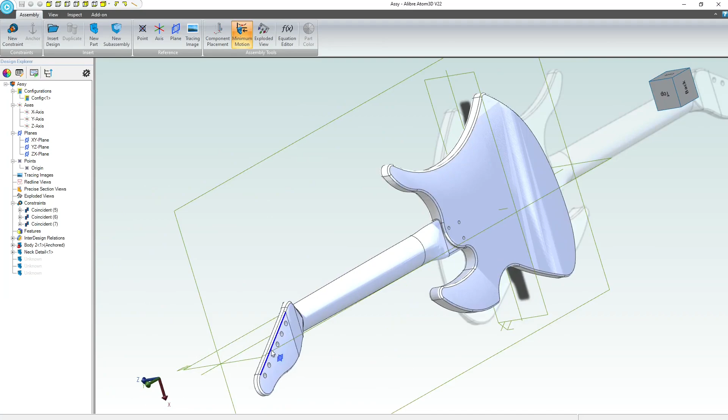Let's make a tuning board for the back of our head here that will accommodate some tuning stuff. I'll get started with that by making a new part.

Let's go with... there we go. We have a symmetric setup there. So now we're nice and symmetric about our origin. We just have to add a few dimensions.

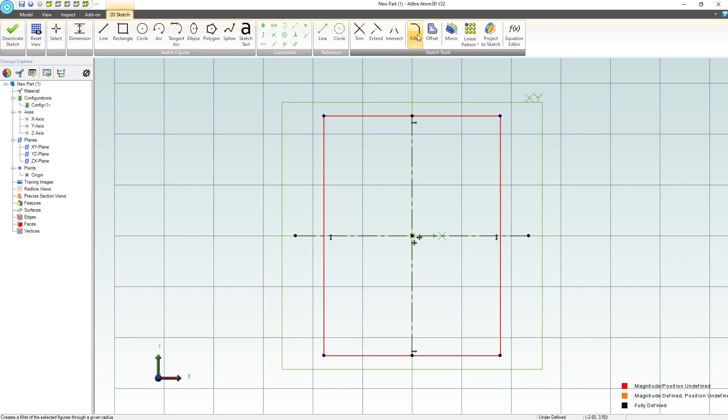Actually, let's sketch fillet this before I add too many dimensions. So we can add a fillet there, apply, and then here, apply. And of course, it just adds an equal relation so that our first sketch fillet determines the size.

And we'll close that. Now let's change this radius to maybe 0.125. Again, I'm working in inches because I have projects in both units.

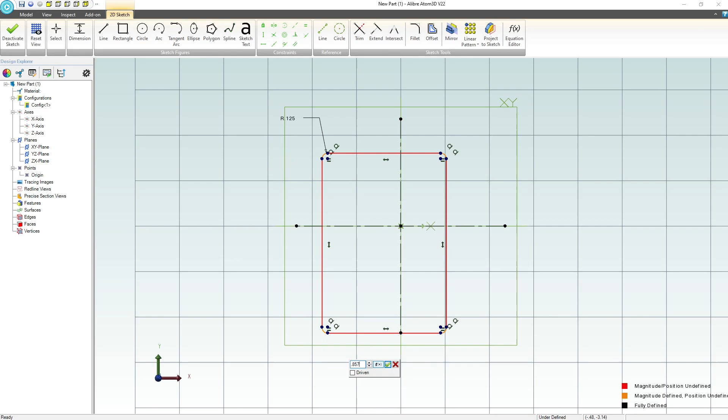Let's go to dimension. We'll give this an overall length here of maybe 0.825 rather, and I'll choose an equal relation.

So it looks like when I've added my sketch fillets, the symmetric relation that I added has not been there anymore, so I'll go ahead and re-add that.

We're going to say there's our line of symmetry and there's our two points to be symmetric. We'll do the same thing over here. And now we're fully constrained.

I would like to add a circle, and I'll add a dimension maybe from this edge. We'll go 0.254.

And then I'll add in just a relation there, 0.4125. I think that'll be all right.

Next, I want to push this out a little bit so we'll just have a little bit of a different profile. What I'll do is take this, right click, and convert to reference.

I'll grab an arc, and then I can add a tangent arc. I'll go with vertical.

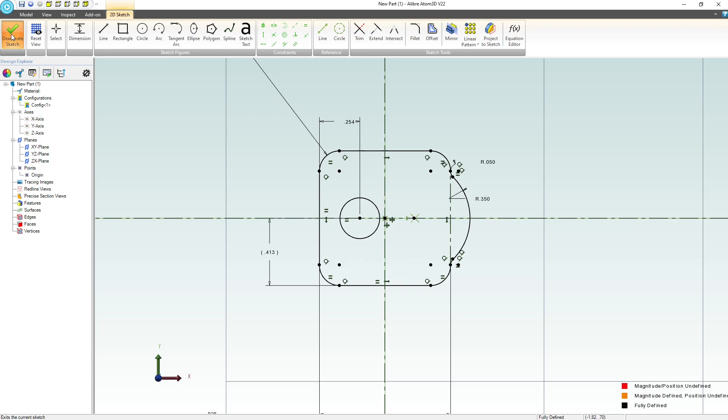So we'll deactivate the sketch, and then we should be ready to extrude. Let's do an extrude. We'll go to a depth of something like 0.05, real thin plate. And then we can move on to the next part.

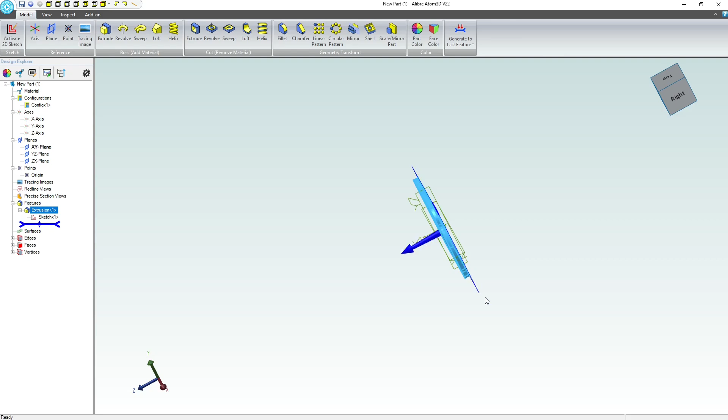And that would be, how about a simple rectangle, right? So we'll say that this plane is the bottom face of our plane, or I should say our tuning plate. I'll activate a sketch down here, and convert a reference figure right here, and that will give me a nice edge to reference off of.

And you can also add that in just with the relation, right? Now we'll go dimensions, and we'll make this 0.275 and then 0.05. You can also make that like sheet metal, right?

If you had Alibre Design Expert and start making this as a sheet metal piece with this being a bend. But I think what we're doing here is just fine.

Next, looks like I did not maintain association. So what I'll do is highlight these two points and say coincident, right? And then just to even things out, we'll make this horizontal.

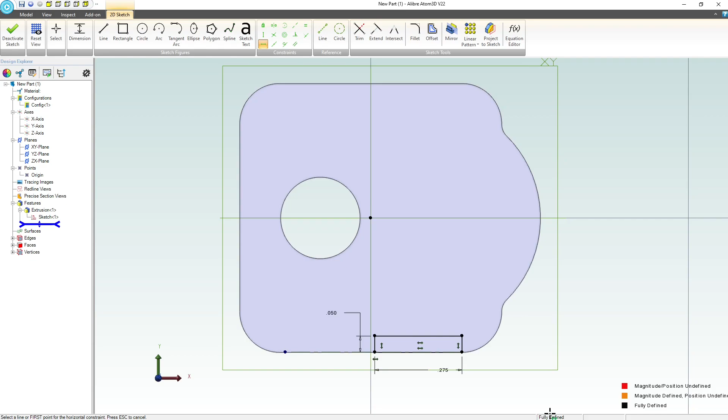And Alibre doesn't fully define a sketch if a construction line isn't fully defined. So we're technically fully defined here.

And how about I extrude? Let's do a depth of like 0.3. And then I have to select my sketch. There we go. All right, so we have that.

Next, let's do another sketch. In fact, let's choose this inside face. You can do either one.

And then from the origin, we'll make this hole something like 0.26. And this could vary depending on your design intent, right? With real design intent, it may be more important to go off of this face. So it's just something to keep in mind, depending on what you intend everything to fit together with.

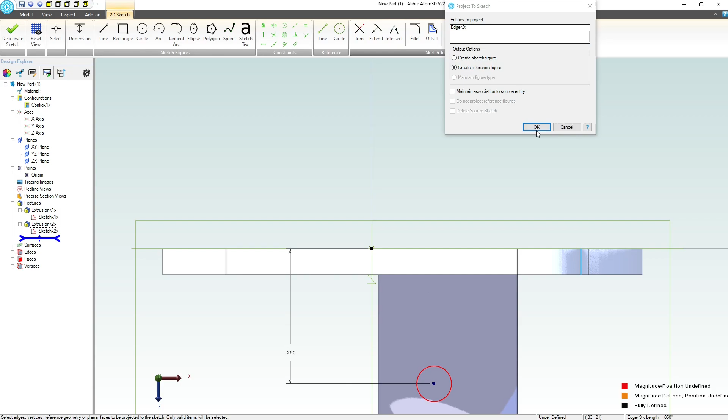Next, I'll project a reference figure. How about this guy? To my sketch without maintained association, right? That's right where this arc ends.

So if I reset my view, I can reference that point, and I'll give this a horizontal dimension of 0.257. That looks about right. And then what diameter?

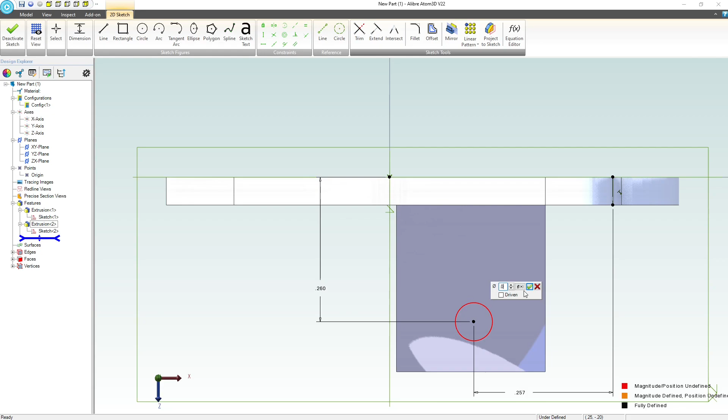How about 0.09? It's not very thorough to just add a hole right there, but I think for the level of our assembly and what I intend to portray, this gives the user the tools for what they need. We'll do an extruded cut through all now.

And let's do a mirror. So we'll mirror this extrusion and that extrusion, both those extrusions, across the ZX plane. And there we have it.

So those are mirrored. I think that is going to be an adequate tuning plate for now. We'll have to add in some screw holes for some really small screws to hold this in place, but we can do that a bit later.

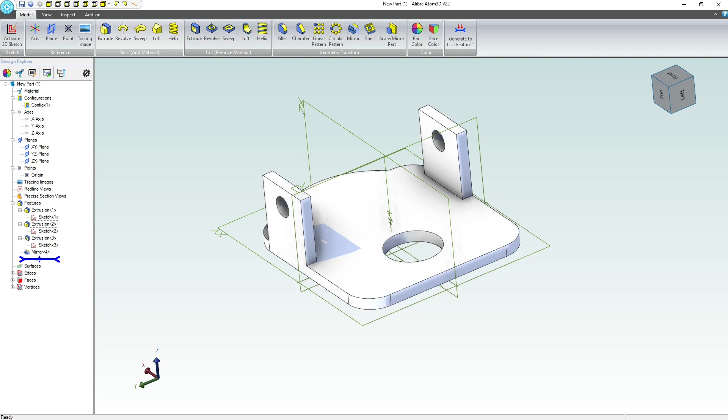So I'll close this part now, and here's our assembly. Let's add the tuning plate that we just made. There we go.

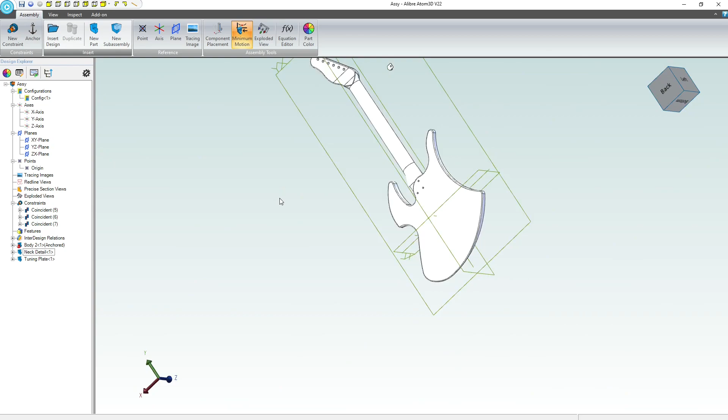So we're going to say new constraint. We'll line these two faces up, flip this guy around, and then we'll take this hole, and maybe I'll start right there, right? And that looks good to me. Next, we'll want to have a spur and worm gear.

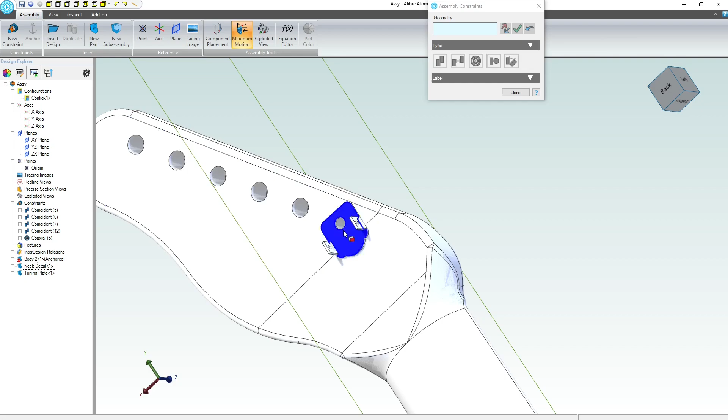So let's talk about how to get a worm gear in there. Now, you can model one—quite difficult, but it's possible. I want to cheat here and use FreeCAD.

FreeCAD is pretty good with gears. So if you're interested in FreeCAD or want to follow along and you don't have FreeCAD, which would be incredible because almost all my stuff is in FreeCAD, here you have freecadweb.org. You can go to downloads and you can download Windows, Mac, or Linux. And I imagine you're using Windows because Alibre is a Windows software.

You can also go to the development versions on the FreeCAD releases page. Version 019 is an excellent version. It's really good, and it's open source, so you can get this for free. It's trustworthy software. I use it almost every day.

So let me open up FreeCAD. I think I'm using version 018 here. Yes, I am. And I'm going to create a new part over here. And in fact, I heavily recommend going to version 019 because this will be a whole lot easier for you to do so.

So in version 018, you may have a broken add-on manager. So you go Tools, Add-on Manager, and if 3D Printing Tools is the only one showing up, go to version 019, the latest version, and this will have an option to install something known as FC Gear, or the Gear Workbench. I already have this installed through other means. So here is the Gear Workbench.

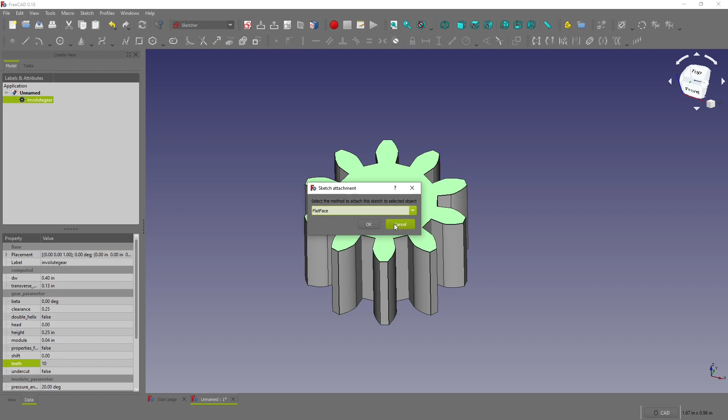I can go to my sketcher workbench now and create a sketch on my face. So that's just as simple as going into Sketcher and creating a sketch. Again, if you're watching this, you're probably familiar with FreeCAD. If not, I've got a lot of videos that cover how to use FreeCAD in depth. But here we're making a sketch just like in Alibre.

So I'm going to start by making—I clicked on my polyline button right here. And I want to add a symmetric relation, right? And so just like in Alibre, I can just click point, point of symmetry, and other point, and now we have a nice symmetric relation, just like in Alibre.

And now I click these two lines. In fact, I'll hit the equal button, and there we go. Now we've got two lines. I'll make a center point arc from here down to here, and then back to my polyline tool.

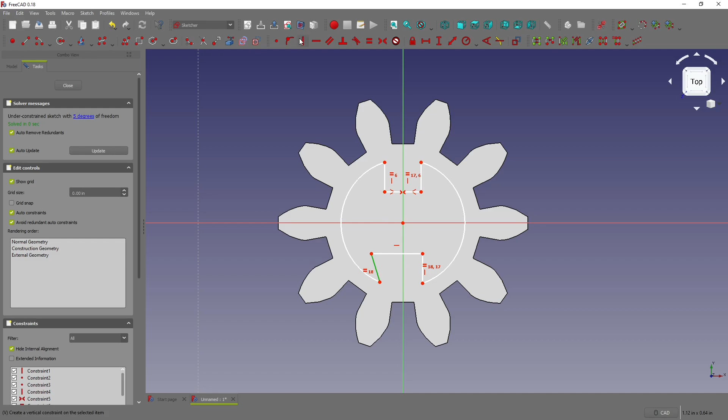And then we'll go back to the center point arc tool, which is right there. Bam! Just like that. Now we're going to say equal, and I'll choose these two lines and these two lines. So now all of these lines are equal. I'll choose vertical here. And we're getting there. I'll choose equal again to make these two lines equal.

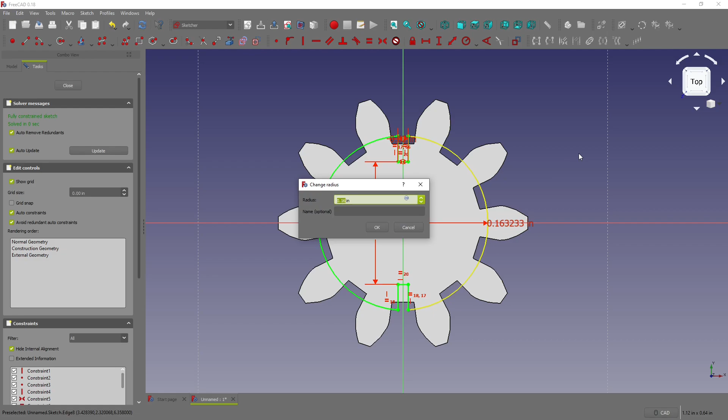And then I think it's just down to dimensions. I'll choose a horizontal dimension from up here, and we'll make that 0.002. We'll choose a vertical dimension here, and I'll choose how far apart I want these to be, and we'll say something like 0.23, there we go. And then I can choose a radius dimension right here, and I can say I want my radius to be 0.255.

I was thinking in terms of diameter, so I'm just going to divide that by 2. Now we'll close, and then we'll do a Boolean.

We'll come over here to the part workbench, and I'll choose Extrude. Maybe I'll make this 1 inch symmetric, maybe 2 inches symmetric, just to see that this goes through. We'll apply and close that.

Now I have this option in the part design where if I click on my gear and then click on the extrusion, I can choose this blue and white circle that says make a cut of 2 shapes. So I choose that, and there I have my final gear. Let's save that. File, save.

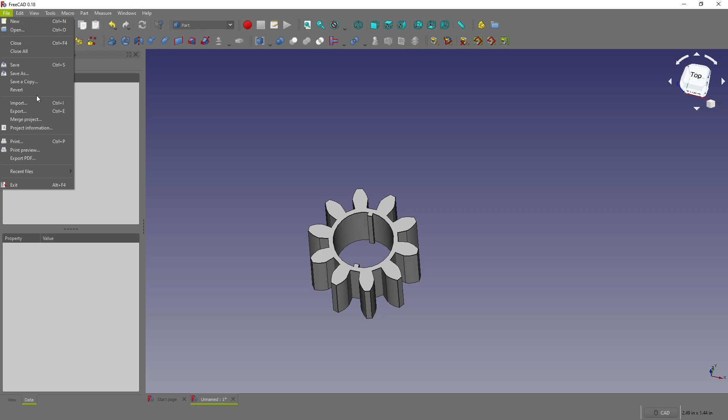This will be available on my GrabCAD account if you'd like to download this. I also will select my gear and choose to export my gear into a step format. I'll call that Spur gear. Save. So there's a step file now that represents this Spur gear.

We also want to have a worm gear for when we go to tune things. So I'm going to go back and create another gear, and I'll click on worm gear, which is the 6th option in. Notice I get a nice 3-tooth worm gear.

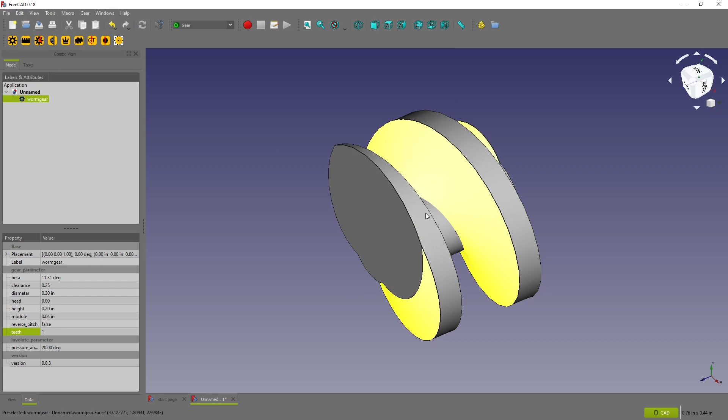So I'll highlight this, and let's do a few adjustments on our worm gear. For our teeth, I want to take this down to be a single tooth worm gear, and I'll hit the little refresh button up here. That will turn it into the 1-tooth gear that we want.

We don't care about reverse pitch. Our module's good. Our height, I'll take it up to 0.5 or 1/2 inch, so I've got a bit of a longer worm gear now. Head is good, diameter is also good, and clearance is good.

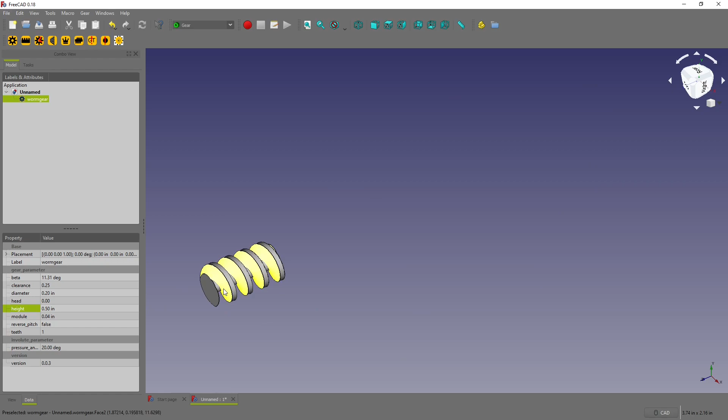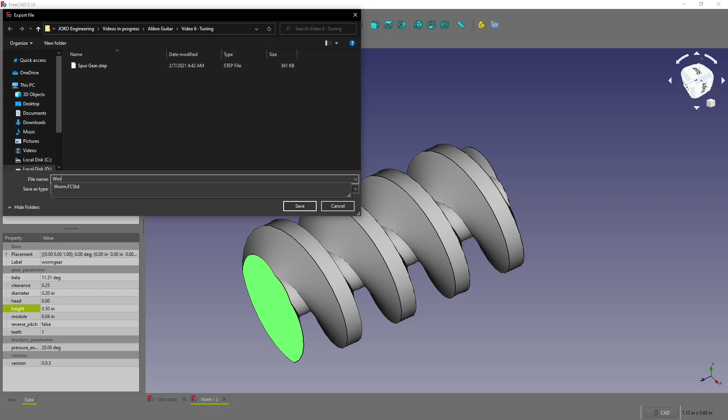I think we're actually looking very nice on this, so let's save this, and we'll save this as a worm. We'll also export this as a step file. We're going to say export. I have step pre-selected, and we'll export that as worm.step.

So I've got several gears. Let me pull Alibre back up. Now again, this is just working in the hobby license. You don't need a special super fancy license to import step files, and we can use that to our advantage.

The first thing I can import would be my Spur gear. That'll be pretty easy. So we're going to say insert design. Now if I try to import my Spur gear, where I stitched a solid, I can have several options like heal or making tolerant.

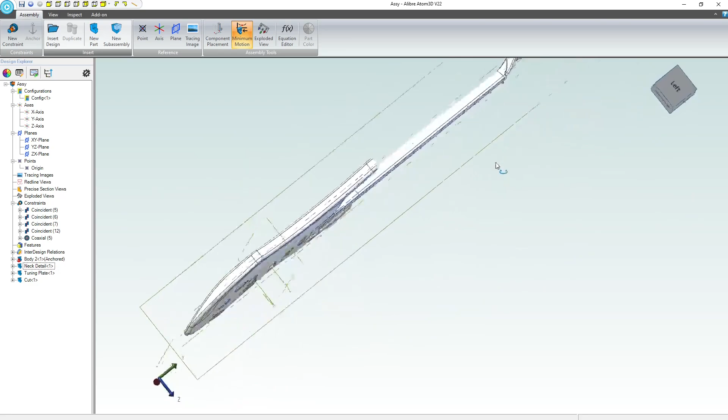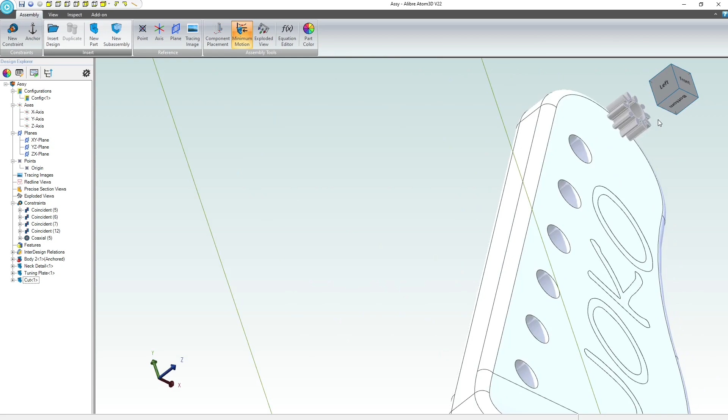My imported body is right there. So there is my step file that I exported out of FreeCAD and into Alibre. One of these days, I know you can get an involute profile in Alibre. You have to do some interesting things, but I'm confident I can. So if there's enough interest, I'll show how to model an involute spur gear in Alibre.

Let's go with new constraint here and make sure that we're oriented right. Looks like we are, so I'll select that. We're going to go with a nice concentric right there. And I really like that when you have dynamic parts in Alibre, you can just click and drag. That is such a luxury.

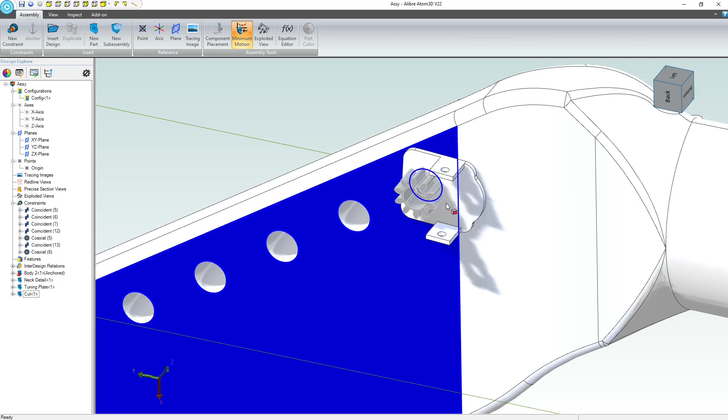Let's now work on our worm, and I want to make kind of the tuning knob onto our worm as well. So for that, I'll open my worm instead of importing it, and I'll heal, make tolerant, whatever.

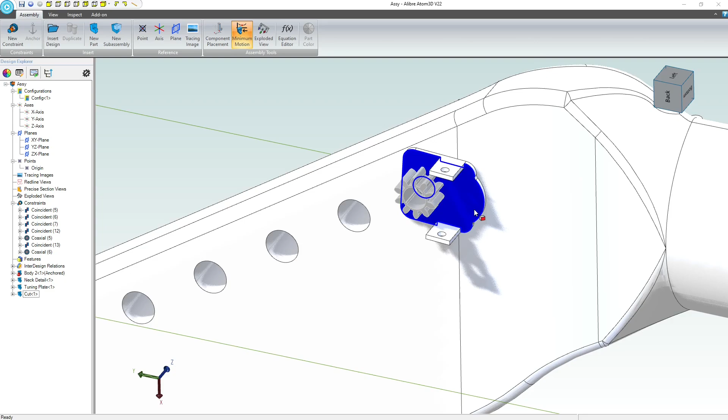By the way, if you do have any visibility problems - oh, and actually I just opened this up and there you go, visibility problems. So if this happens to you where an imported part isn't showing up, it's actually pretty easy to work on.

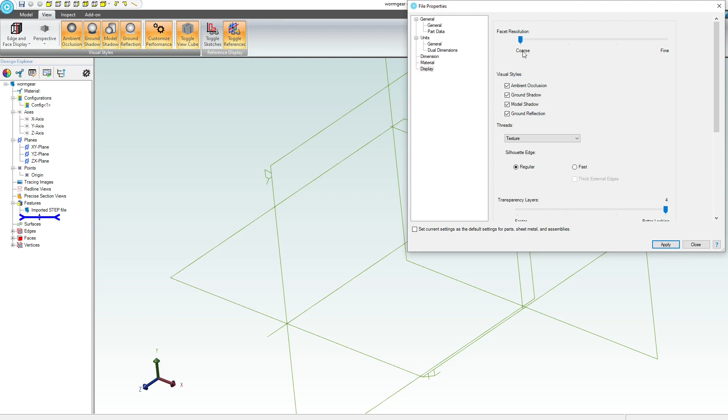We're going to go to our View tab, customize performance. I'm going to take my facet resolution, drag it all the way to coarse, or if it's already on all the way coarse, you can drag it to some other setting, say apply, and then it shows up. Then I'll just drag it back to my previous setting, apply, and look how much finer that became. That was a pretty easy solution.

So what I would like to do is make a sketch, how about right on our XY plane. We're going to say Model, Activate 2D Sketch, and I'm going to create a circle right on my origin. We're going to use a dimension and make that about 85 thou, 0.085.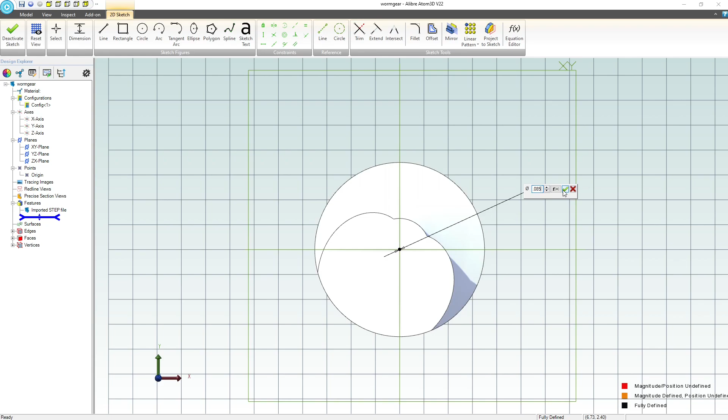For some reason that's in millimeters because it came from FreeCAD, right? So I'm going to type 0.085 inches. There we go. A lot of my FreeCAD projects have become metric. Let's go with Extrude. We'll go dual depth.

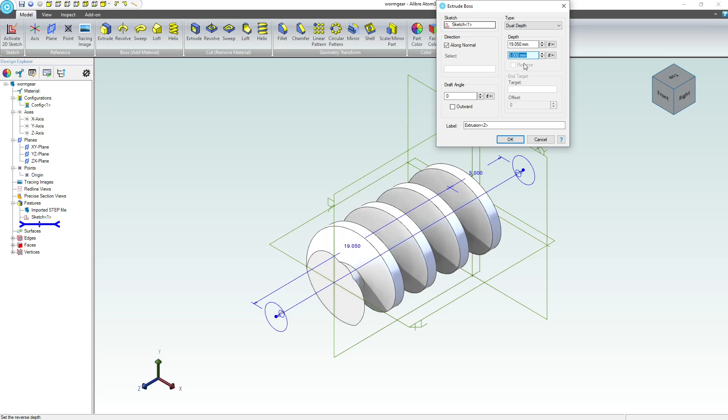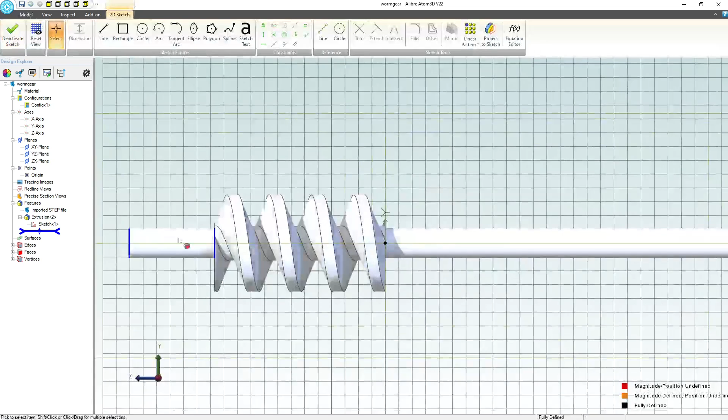How about we have this side be 0.75 inches, and we'll come over here, 1.25 inches. That's the length I want. This is the rod that our worm gear will spin around. I think I'll need a spacer to put in our prongs, so I can just model that right in here.

Let's create a reference figure to here. I'll maintain association, and I'll choose a vertical relation between these points, then a horizontal relation between this and the origin. Let's go with a dimension of 0.116 -- and of course, I need to change this document to inches, but I think I'm almost done, so we'll be okay. And then 0.065 inches.

Let's deactivate. We'll do a revolve. I actually need to choose an additive revolve -- that'll be much better. We'll revolve around that axis. So we click on this axis, we revolve around it, and that's looking good.

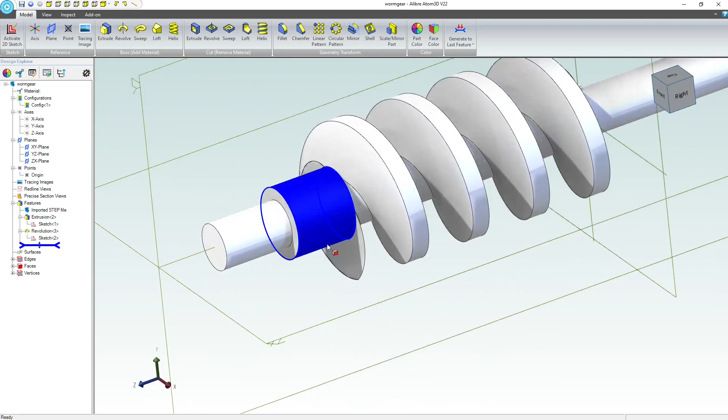Now I think we'll just add the tuner, cut it to the right size, and we're done. I'll activate a sketch on here, and I'm going to make a line. Actually, let's focus on using the sketch mirror here. I think that would be very efficient.

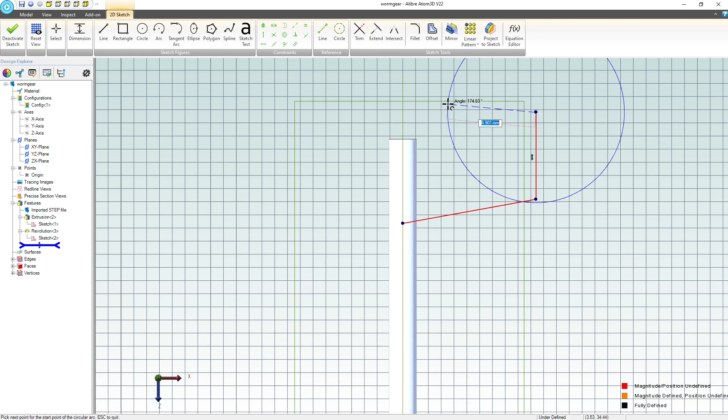I'll choose an arc -- a center point arc, so I'll put the center right on that center axis. We're going horizontal from here to here. We'll add in a dimension and make sure this is radiused properly. I want to go 1.25 again, inches.

Let's go from here to -- nope, I want to have an angle. Can I reference this for an angle? If not, let's grab the center line -- that's just as easy. From here to here, we'll take an angle. Let's say 160 divided by 2, or an 80-degree angle, so you have 10 degrees off horizontal on either side.

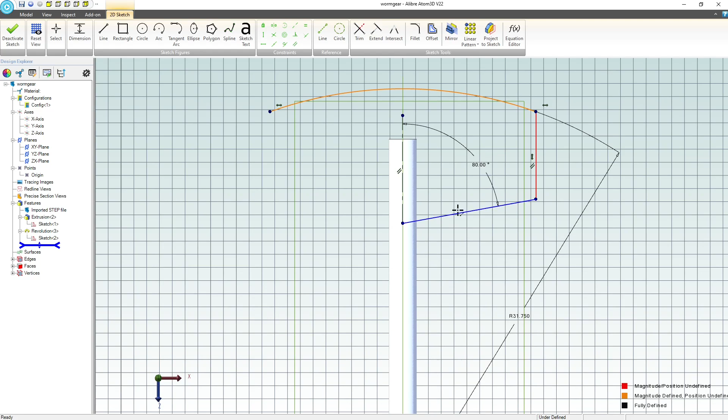When we go to mirror this, I'll take this point and dimension it relative to my origin. We'll say 1.211. Of course, I would like that to be consistent with my top level units -- I really should be changing my units, but I'm almost done, I can taste it. From one side to the other, we're going to say

0.75. All right, finally, I'll give this a height of 0.35.

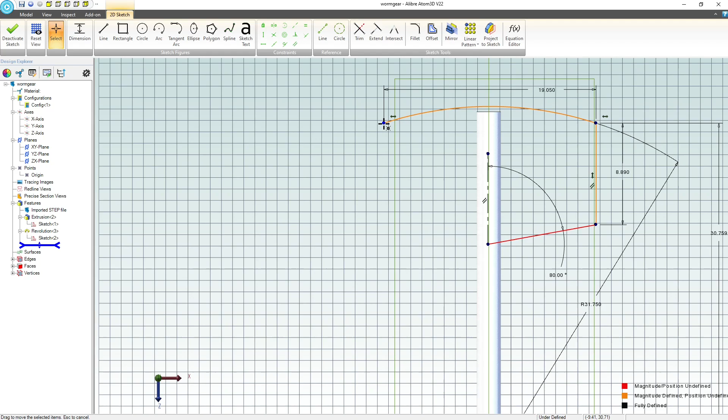I'm sure I'm driving someone crazy by typing in my unit instead of adjusting it. Let's determine how wide we want this to be. All right, so we've got our center point here. I'll grab my origin -- of course, you have to hold Shift when selecting multiple things.

And I'm going to say vertical. So this is our... it says this line is lacking magnitude. Ah, there we go -- we just need a little vertical relation.

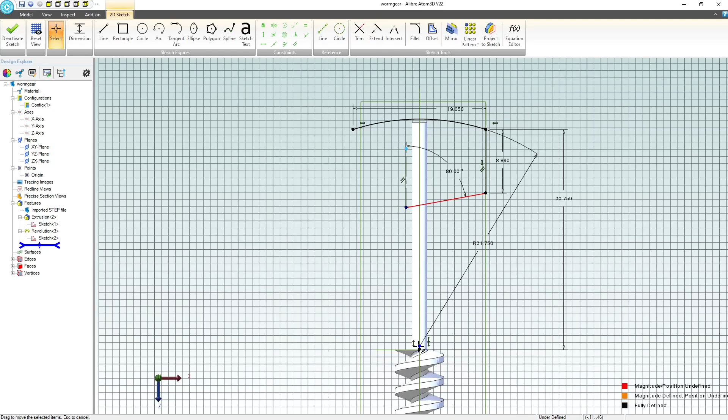Let's go with a line. Actually, we'll just mirror -- mirror here and here. We'll mirror about our axis, and we're fully defined, so we'll deactivate. We'll do an extrude. Let's say mid-plane, and we want to go to a depth of 0.125.

Okay, and this should be our last sketch down here. I think it should be pretty easy. We'll grab our XY plane, or YX plane, no matter what you call it. Let's try to make this as easy as possible. I'll import a reference figure.

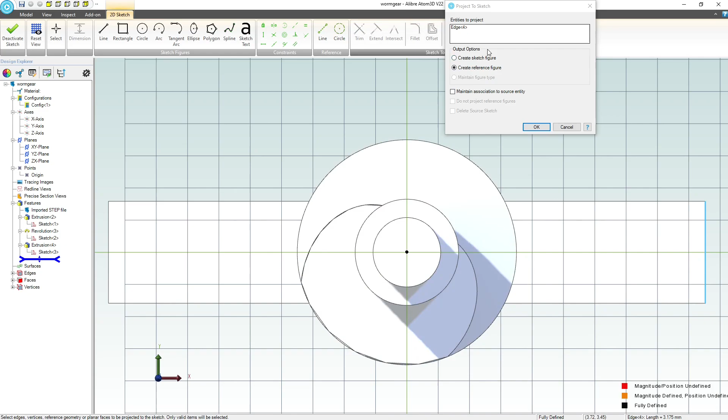I'll import, how about just that edge, maintained association. And let's go with an arc. It's so nice for Alibre to be able to allow us to grab the center point so easily. We'll add a dimension here and say, how about 0.02 for our radius, right?

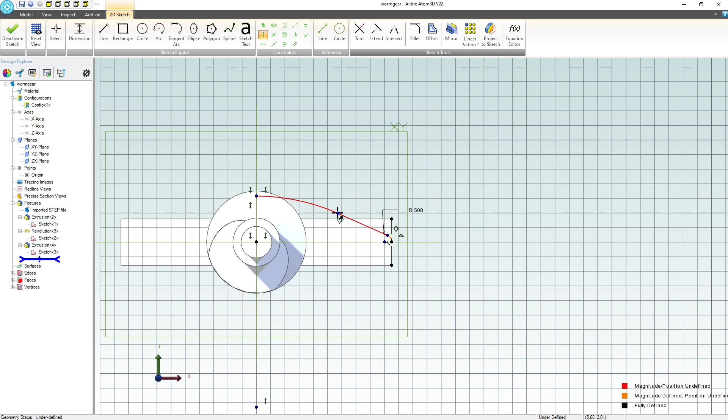Nice small radius. And then we'll go to line, we'll go to tangent -- we'll go tangent arc. And again, how I'm approaching this is really dependent on the engineer's design intent, and there are pros and cons to what I'm going to do. Let's go with vertical, perfect. Next, we'll add in a horizontal relation from here to here.

So I'll grab in my arc endpoint and this point here, and we've added a horizontal relation, which is what we want.

And then what kind of radii are we looking at? Maybe I'll just dimension this. From there to there, we'll give a horizontal dimension of 0.15.

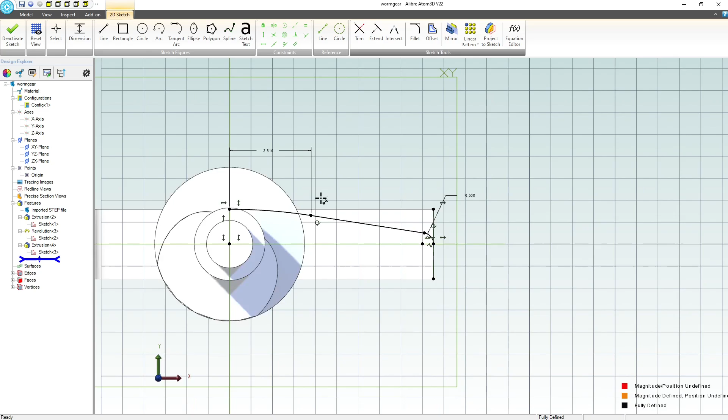Okay, so here are the pros and cons of what I'm about to do. The pro is that I'm doing a lot less sketching by just doing this in a quarter. The con is I'm going to have two more items in my history tree to recompute. So what I could do is mirror my sketch to the other side and do one mirror, but I'm going to do two mirrors instead and just do a quarter of this.

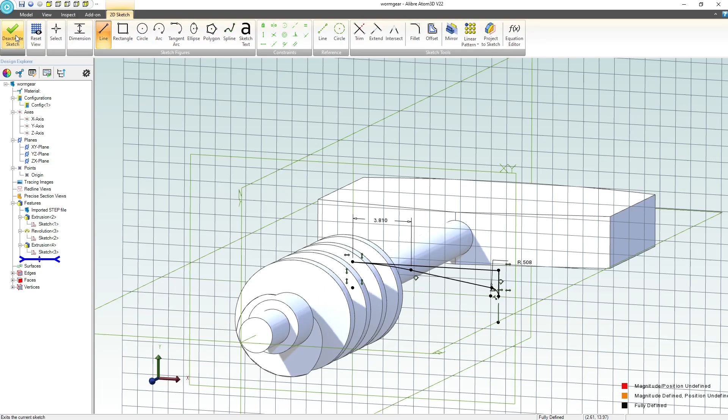So I'll deactivate. I'm going to do an extrude cut, so I'll specify to depth. We'll reverse and just type in something big. Hey, I thought I reversed that.

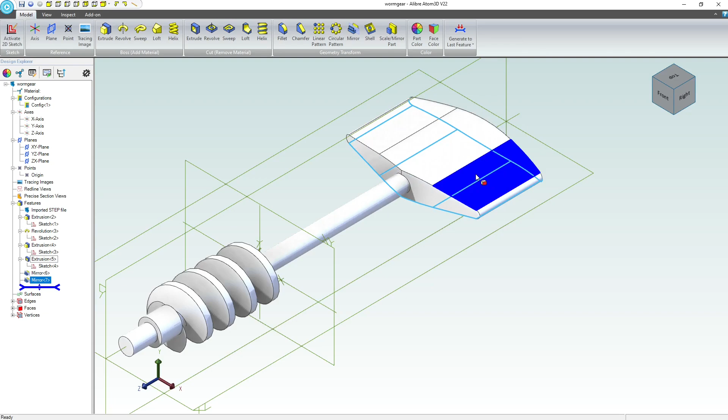So we'll edit, reverse, okay. Right, now is the fun part. I highlight my extrude, we'll do a mirror across this plane and say okay. We'll do another mirror across this bottom plane, and I'll also select my original extrusion, and there we have our knob.

So we'll save that, and we'll save that as our worm, and that will save it in a nice Alibre format for us.

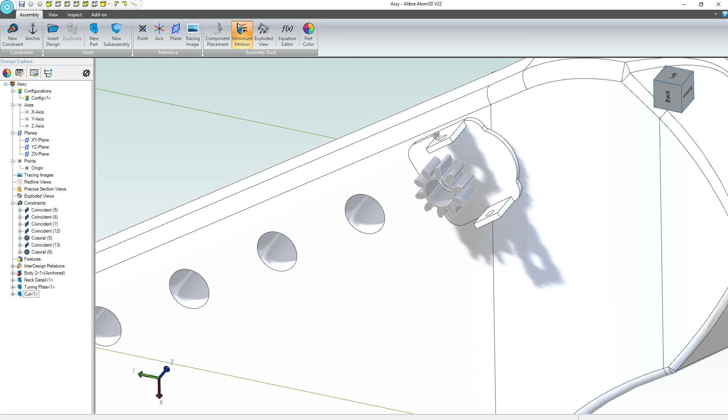So importing and editing step files is really easy with Alibre, and that makes it quite advantageous. I think I'm going to angle my tuning plate to be kind of parallel with this face here. I think that will make for a pretty good look on the guitar. I could possibly flip this all the way around, but I might get some interference, so I guess I wouldn't get an interference if I were to continually pattern it.

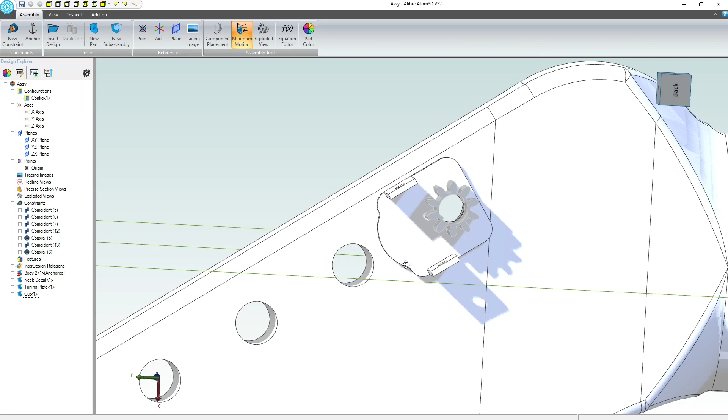Okay, let's try doing it like this. I'm sold. Let's insert design. We'll insert our worm gear now.

And there we have it. New constraint. We're going to go there, and I'm going to flip sides so that my tuning knob is on top, and accept that.

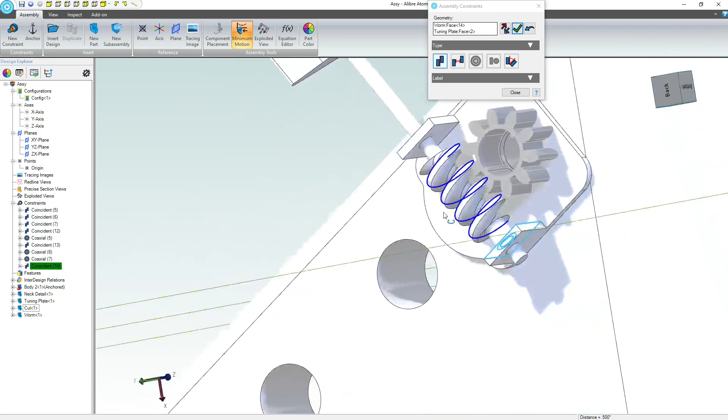Now we're going to go there to there. Excellent, and that fits about perfect. So we'll close that.

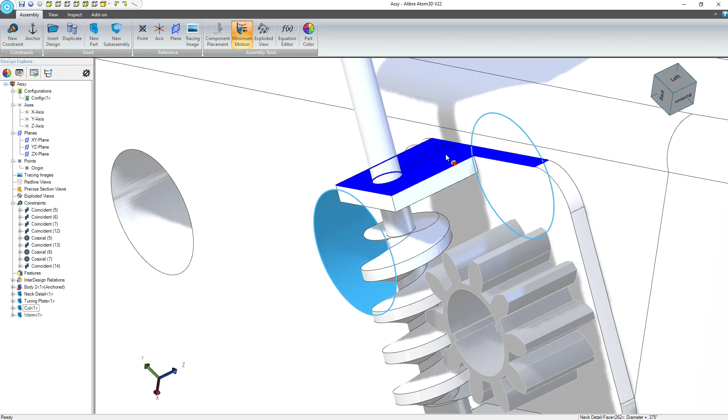Alright, so we've got a pretty good mesh on these gears, and I think we're looking good. So I'll create a new constraint. I'll choose this face, new constraint, and this face. And we're actually going to say 0 degree angle, and that means parallel. So we've added one of these.

Next, I can actually duplicate my part. I just hold control, and then I click and drag, and I can duplicate these all day long. And that's a super nice feature that Alibre offers.

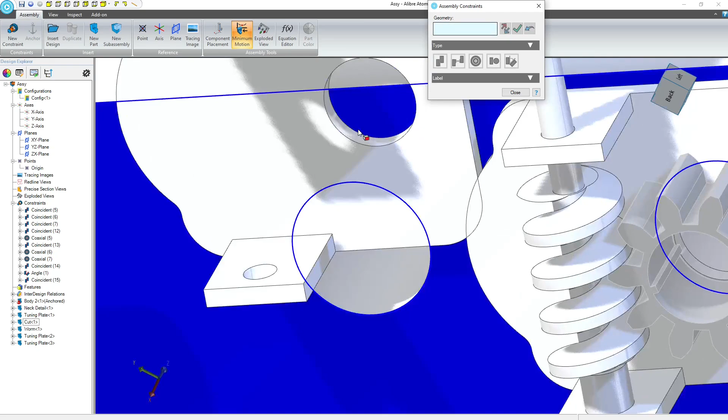Let's go with a new constraint, there to there, and coincident, right? And then we're going to say coaxial. Now that's a pretty good fit for tuning plates, I think. And then from here to here, we can choose that. Oh, looks like coincident doesn't work. So we'll choose an angle of 0 degrees.

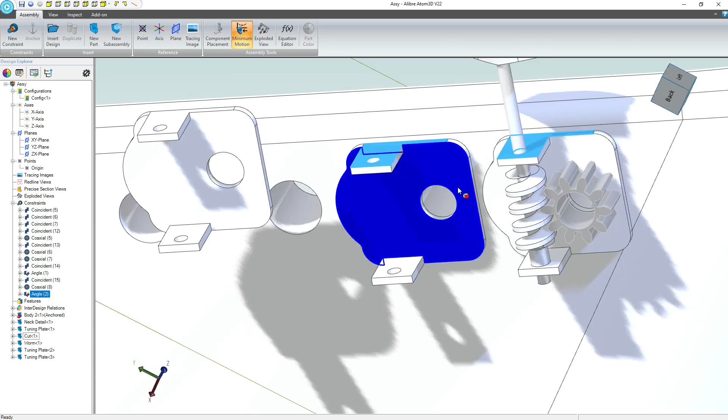So that should be fully defined. I believe it is. Yep, this will still move on us. So I'm just going to finish adding all these parts, and then we'll proceed. I won't make you sit through this because you may or may not be trying to do this at your own pace.

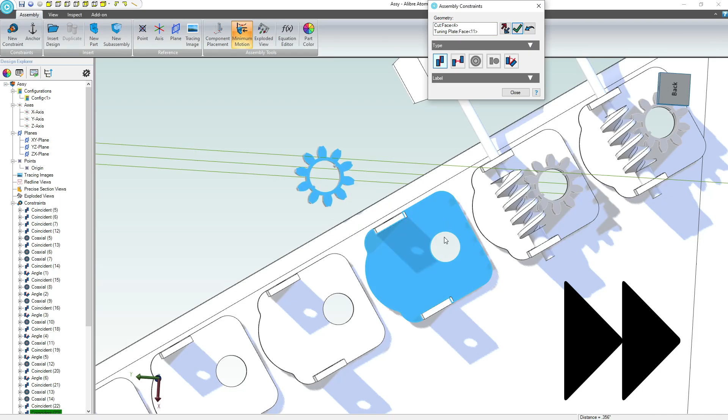Alright, so we got these all together. And there's a few in-context designs that I think would be pretty good to add, right? So in real life, we'd probably have some slack from here to here, and anyone would be able to question how this would be put together in real life.

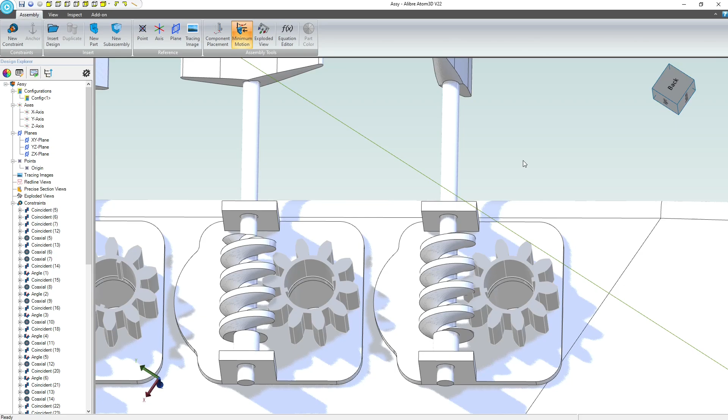And I've got so many projects that I'm working on in addition to freelance, my full-time work, multiple CAD projects for the channel. At certain times, I'm going to be clear - there comes a point when you say enough detail is enough detail, and this is enough for me. So I'm not going to worry about actually putting this together in real life. I think for someone who's actually doing a guitar design, this would be pretty easy and intuitive, and I think I provided enough information to get over the concepts of doing this in Alibre.

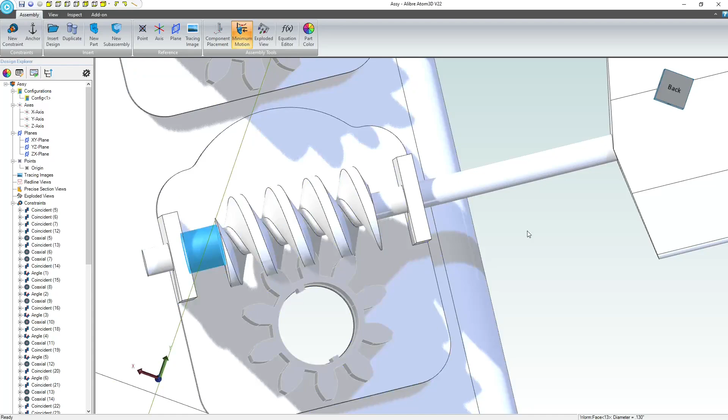So let's do an in-context edit. I know I've done this before, but since not every CAD modeler is capable of in-context stuff, I think it's very good. Let's activate a 2D sketch. And this is, again, editing the part and not the assembly. I'm going to reset my view twice, and that will take me to the side that I'd like to look at. Make a rectangle right on the origin there.

And I don't think dimension... Oh yeah, we'll grab that edge. But I don't know if I can go... Yeah, there we go. Let's go maybe 0.01. Yep, that's maybe 5 thou. Right, maybe we'll make that a real tight fit.

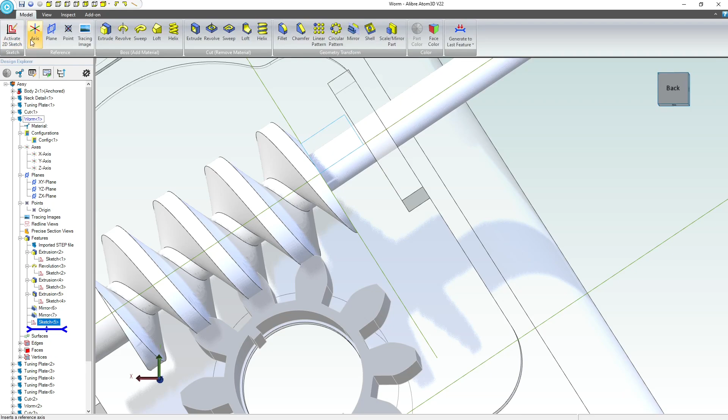Well, okay, 0.01. Well, we don't want to have too much slack, but the string tension would pull, at least it should, pull any backlash out of the gears as well. We'll go precise, 0.005. That's kind of a tough decision on how you'd want to gap that. We'll go a bit higher, maybe 0.007. We'll deactivate. We'll do a revolve, an additive revolve.

And our axis should be a no-brainer.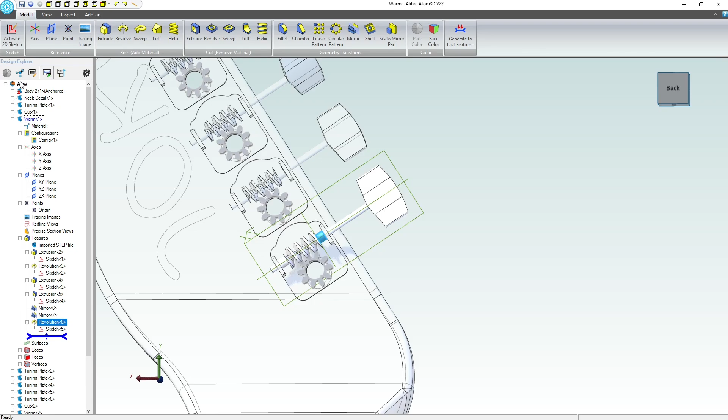There we go, that's our center axis. I'll go to my top assembly here and say Edit Part Subassembly. Now all of our worm gears that we've added have the same addition, and it updates automatically. We edit one, all of them change.

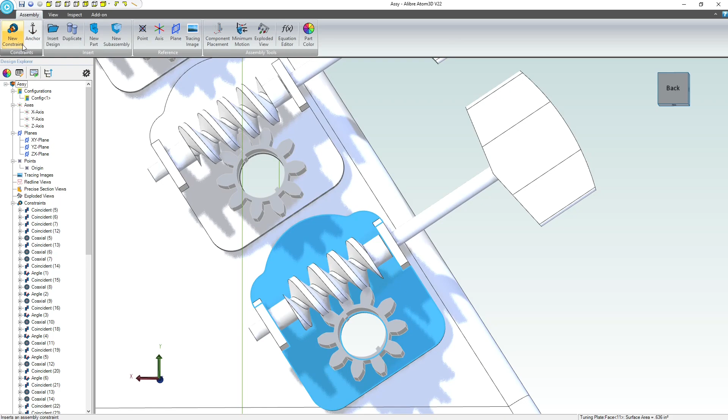Now we're going to have screws that will hold the tuning plate to the back of the head. All I can edit here, right? Make it pretty easy. We'll activate a 2D sketch on the face we've selected, and project, creating reference figures with maintained association.

Let's add some circles depending on what screw size you want and what your head shape is. This might change, you might want to stick them more towards the corners, so keep that in mind. You don't want the head of your screw to intersect with our spur gear. So these holes are equal. We'll say dimension, 0.0625 maybe.

Then I'll add in another circle, put it right on that axis, and add an equal relation so that all these are equal. We'll add a dimension, a height from this hole to this hole, because your hole pattern would be what's critical, 0.784, something like that. And then I want this axis and this hole's center to be coincident.

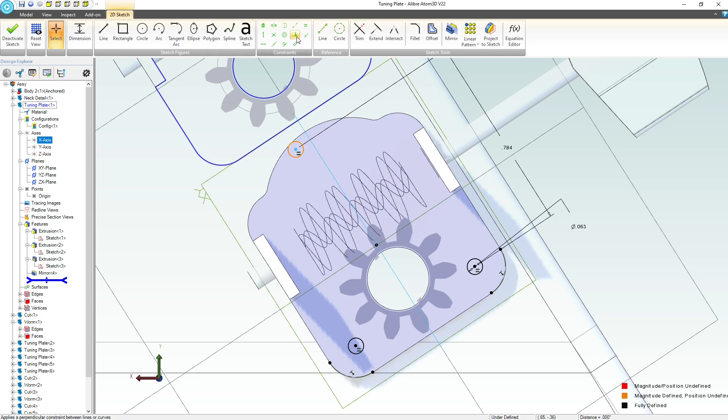All right, so we've done that. We'll deactivate, do an extrude cut, and I think I have the luxury of saying through all. Again, that edited the part, not the entire assembly, and that extrude cut showed up on all of our plates.

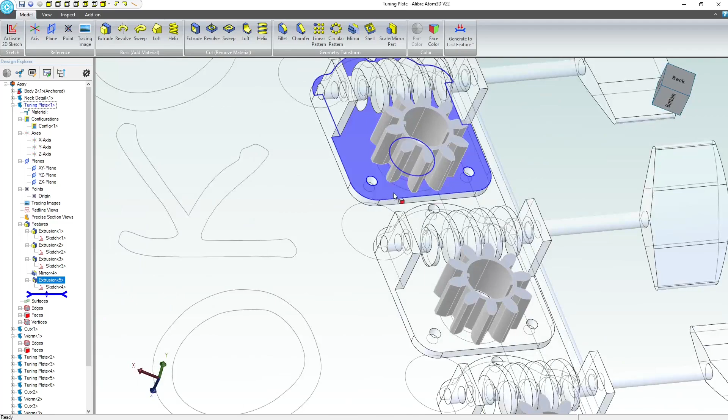Now, the nice thing about in-context editing—and you do get complications, right—this can lead to errors when you go to edit things a certain way. So you have to in-context edit in a way that makes sense.

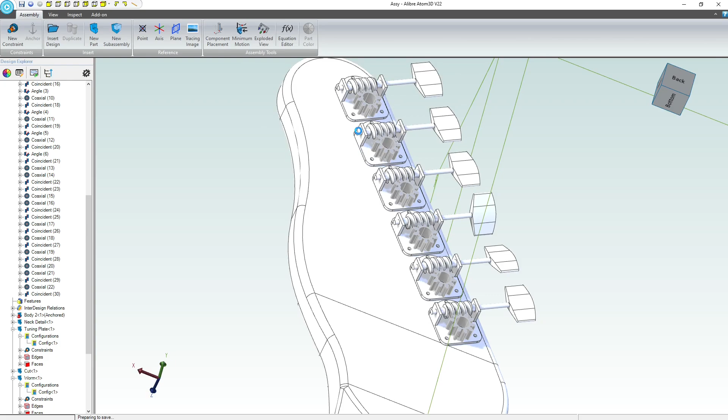So we've saved everything. Let's edit our head. And again, in-context editing carries different aspects of things that are good and bad. So if I were to move my tuning plate, the holes will move with it automatically, and that may or may not be desirable.

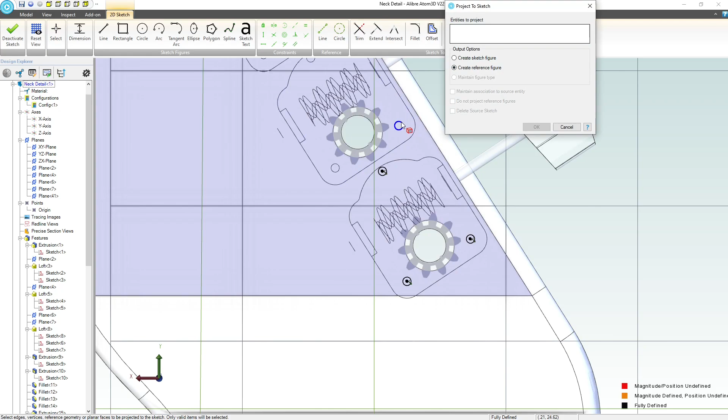So we're going to activate a 2D sketch on our face, and I want to project these 3 holes. In fact, I can click every hole if I wanted to. We'll maintain association. Another shortcut is I can project a reference figure with maintained association. I'll grab a dimension and pull out my center to center dimension, 1 inch exactly, that's pretty easy. So I know these holes are 1 inch apart.

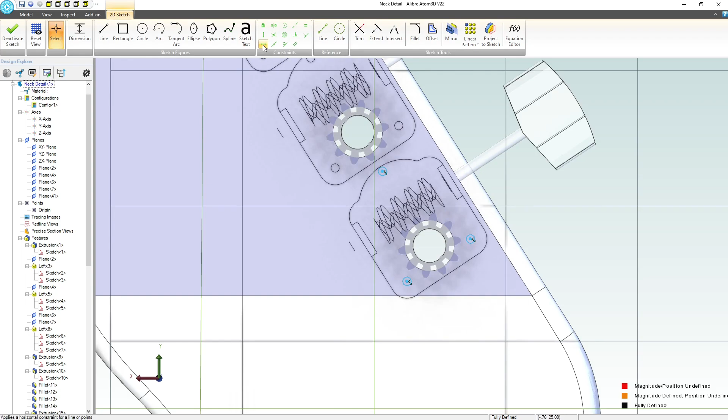Let me select all of these, and we can simply do a sketch pattern. We're going to say linear pattern, and a linear path that runs symmetrical. We're going to say 6 instances, and we're going to change our direction. We'll say OK.

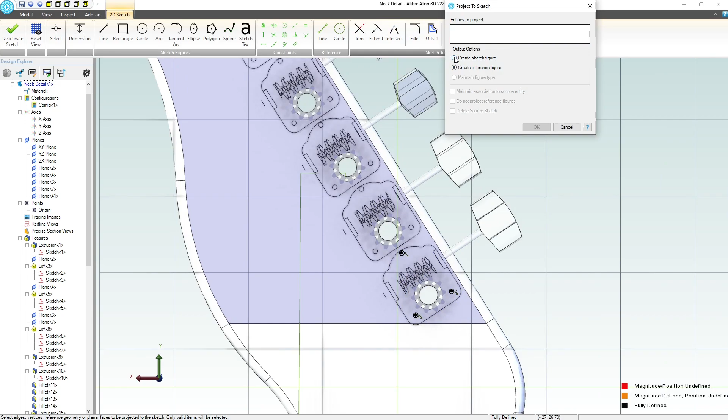And these came in as being red, of course. So we have this linear pattern. Notice that none of these are constrained, so that could be a drawback. But linear pattern, if you need to make something quick and you're not worried about constraints, is an option. I think a project to sketch with maintained association, just clicking these holes, is probably more in line with my design intent because I can fully constrain everything.

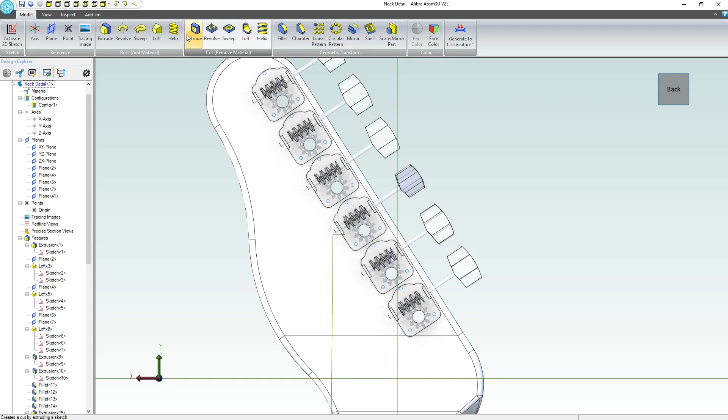So I'll finish clicking these holes and then we'll create them. Alright, so we've made those, and then we'll deactivate and do a cut extrude. Let's go to the right view. So we've gone to a depth of 0.25 in the wrong direction, of course. We'll reverse that.

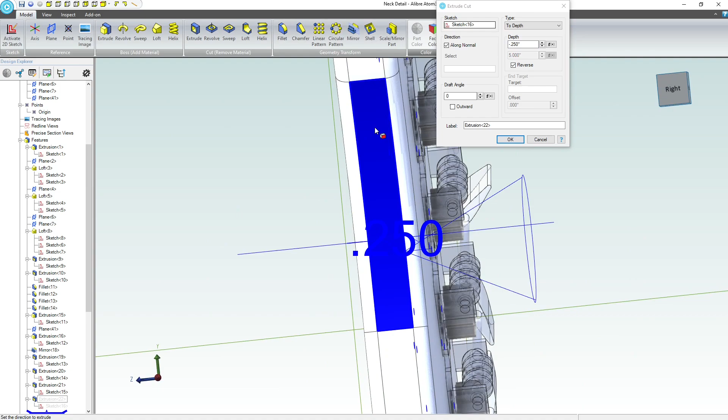Yeah, that should be deep enough for the screws. You would want to make those a bit smaller so that you could tap them or something like that in real life. So I think that covers the tuning mechanism.

We'll just need to come up with a post. I think I've been going on for quite a while, I believe I have. So instead, let's make the post next time around.